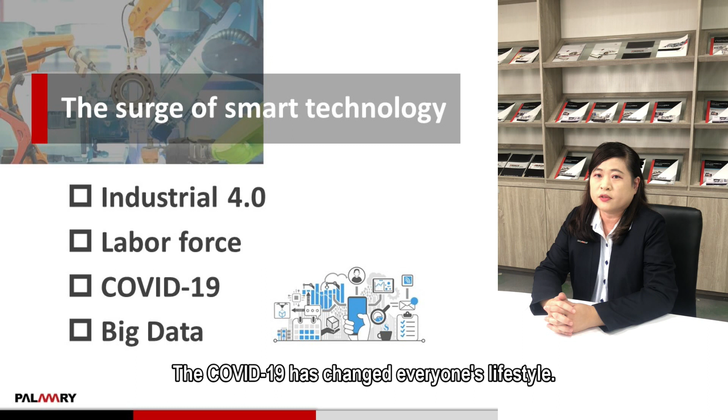It is an extremely unfortunate year in human history. The COVID-19 has changed everyone's lifestyle, but it is also an opportunity for labor patterns to begin to change. Long-distance work is not just a simple matter of working at home. It is not just a transition plan for advanced development in the virus period. It will bring huge change to the future labor market, and the long-distance work model will gradually enter and impact the overall labor market.

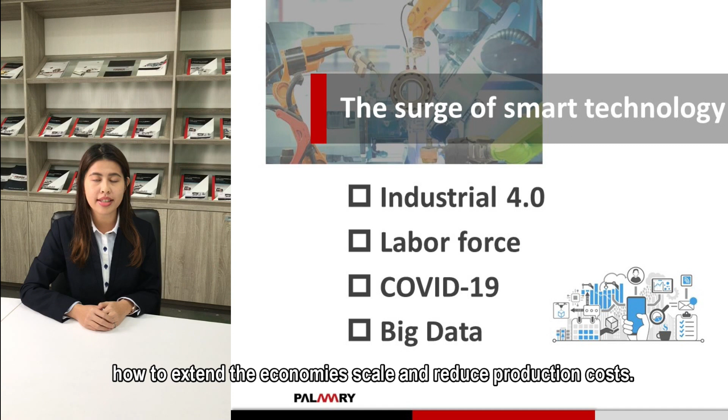Vanessa, do you think COVID-19 has changed the industrial supply chain? With increasingly global competition, companies are all thinking about how to extend the economy of scale and reduce production costs. Thus, smart technology has become a trend gradually. Most companies require automatic solutions to reduce capital expenditure and increase productivity.

So, Isabel, what's your anticipation on industrial automation? In the current production automation, industrial robots, machine tools, and industrial computers are all important applications. They allow manufacturers to reduce part of the manpower on the production line, achieve production goals more efficiently, and in the process of manufacturing industrial robots, machine tools, and other mechanical equipment, and in the production equipment used in the semiconductor and optoelectrical industries, we can see there is an indispensable part.

Without it, this device will not run smoothly. Without it, these products will not be able to achieve the accuracy required by the industry. Therefore, the part is known as a small screw in the mechanical equipment. It can also be said the transmission components are indispensable parts of automation equipment.

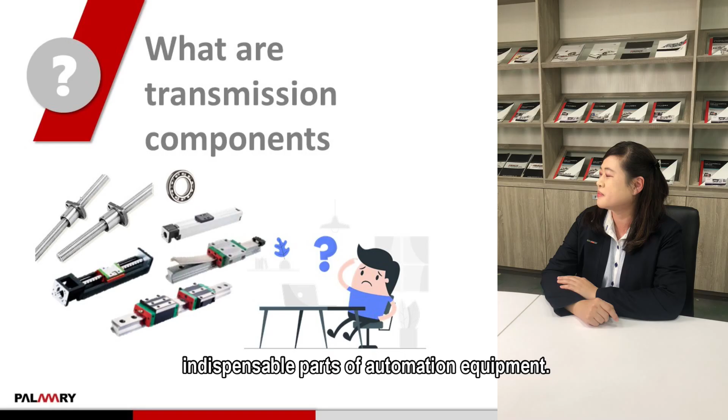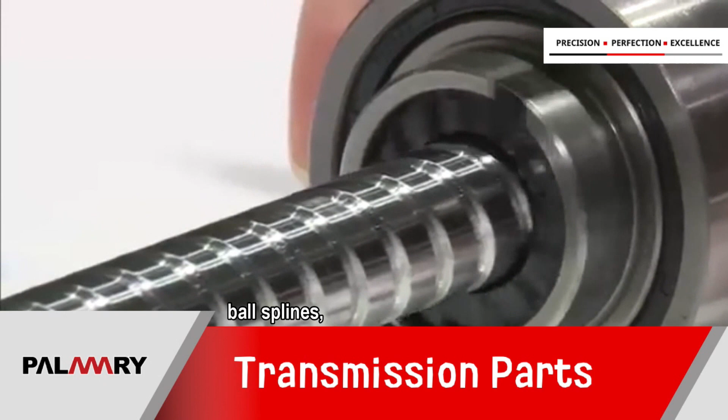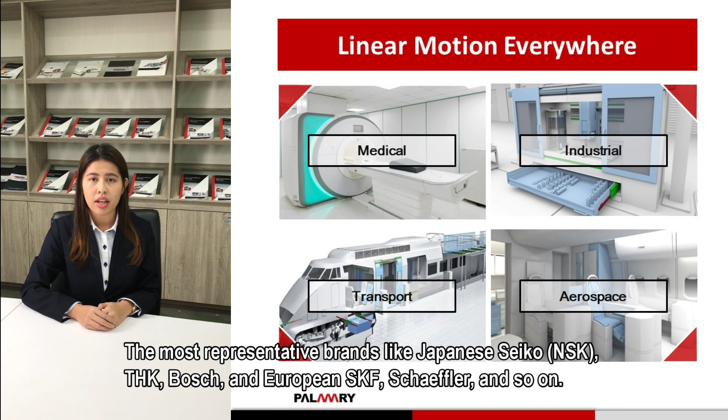Vanessa, what are the transmission components? The so-called transmission parts include ball screw, linear slide, ball spline, and single-axis robots. They are not only used in smart factories such as manufacturing, aerospace, and automobile industry. The most representative brands are Japanese Seiko, THK, Bosch, and European SKF, Schaeffler, and so on.

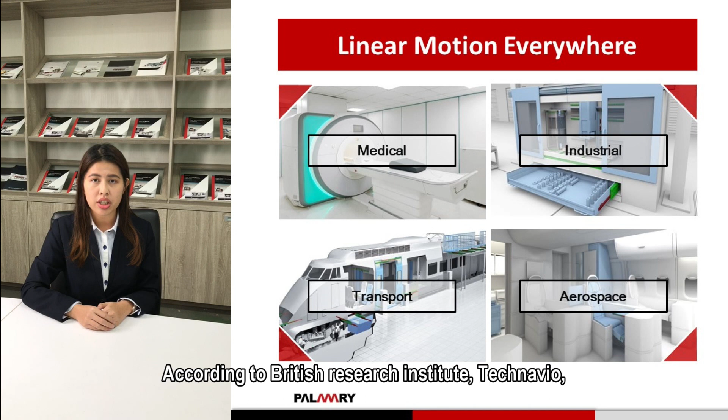Besides, the transmission parts market has been booming recently. According to British Research Institute Technavio, ball screw and linear slide are the majority of transmission use.

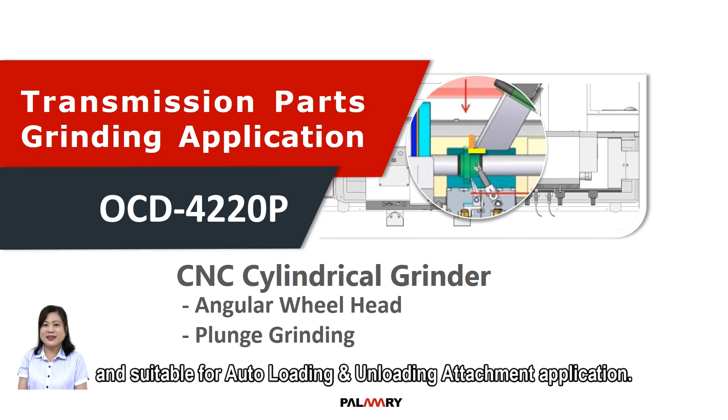Let's talk about the transmission parts application. We use model OCD-4220P CNC cylindrical grinder with angular wheel head with plunge grinding. It can grind face and OD at one time, and also adapt with synchronous tailstock. It can drive the parts directly without the other cam lock or driving parts, to shorten the setting and cycle time, and is suitable for auto-loading-unloading attachment application.

The machine spec: swing over table is 420 mm. Distance between center is 200 mm. Maximum grinding diameter is 400 mm. Maximum loading between center is 115 kg.

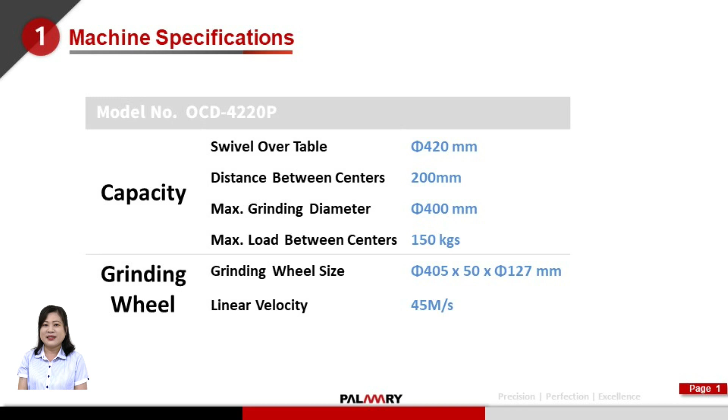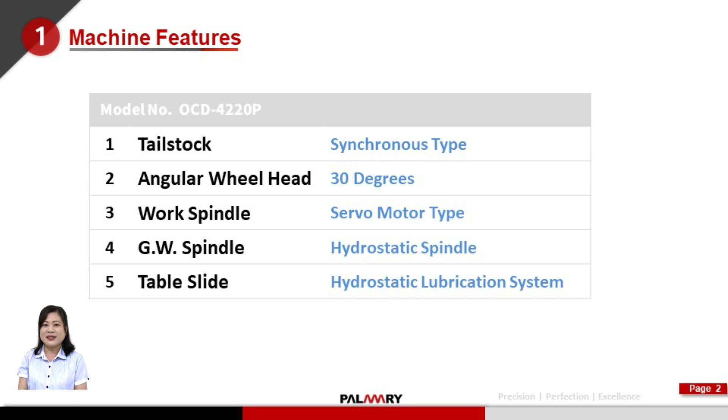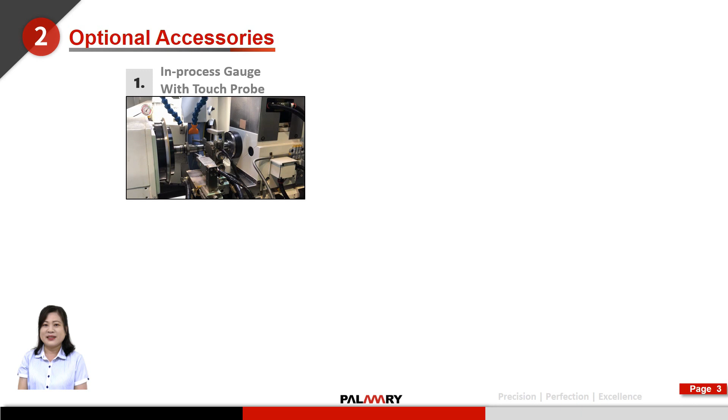Machine features: synchronous tailstock, angular wheel head with 30 degree, workhead spindle with servo motor controller, grinding wheel spindle with hydrostatic bearing, table slide with hydrostatic lubrication system. Optional accessories include in-process gauge with touch probe gauge, wheel head balancer, diamond roller dresser, and synchronous tailstock.

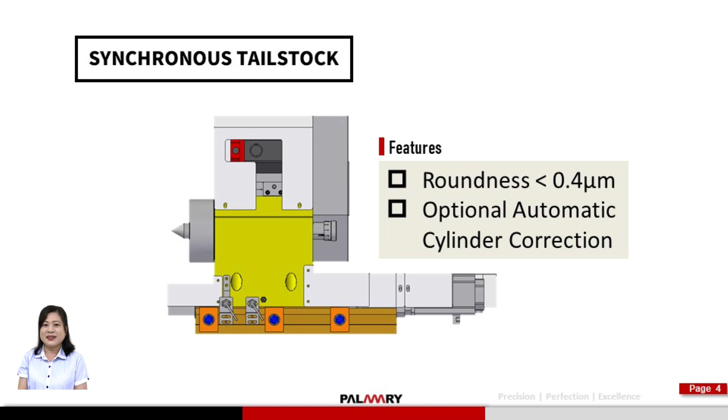Synchronous tailstock features: it can achieve roundness below 0.4 micron, optional with automatic cylinder correction. The workhead driving and tailstock driving work together, which can shorten the cycle time.

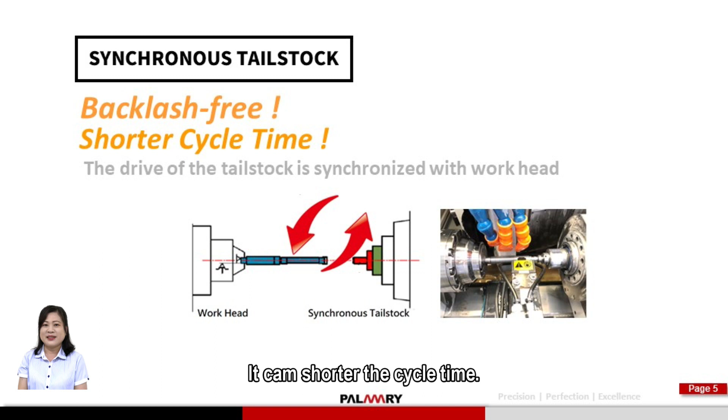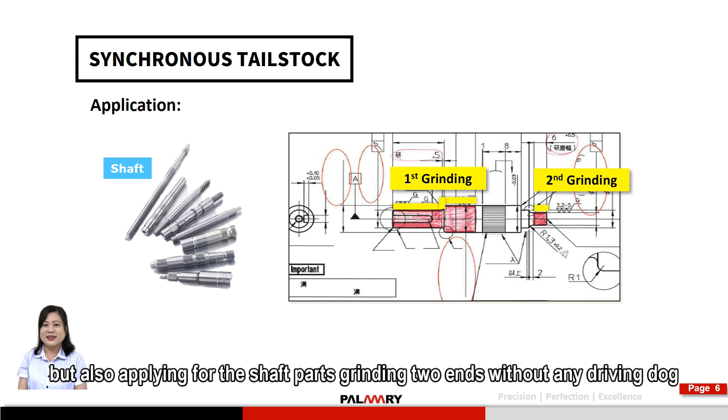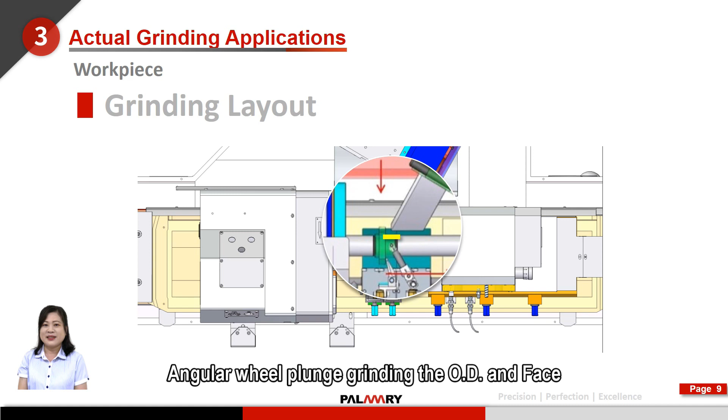Application: it's not only for transmission parts, but also applies for shaft parts grinding two ends without any driving dog, the ball screw nut face and OD grinding, and angular wheel plunge grinding the OD and face at two-end driving to increase grinding efficiency.

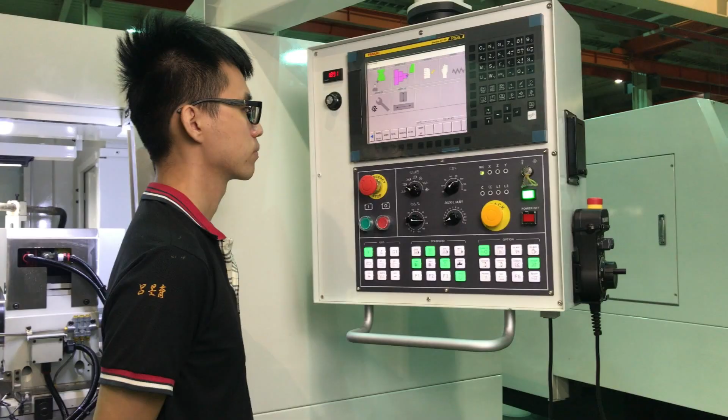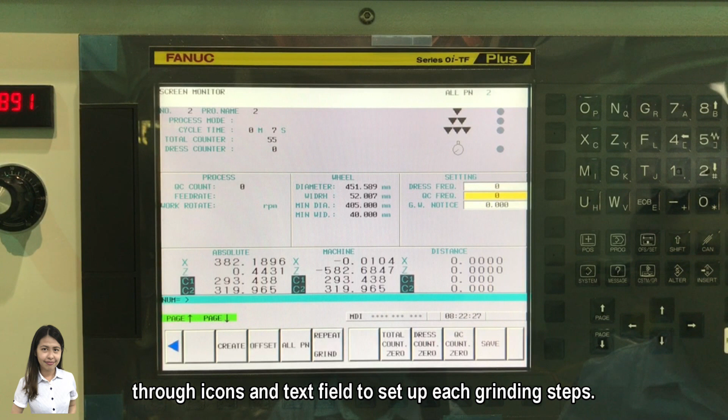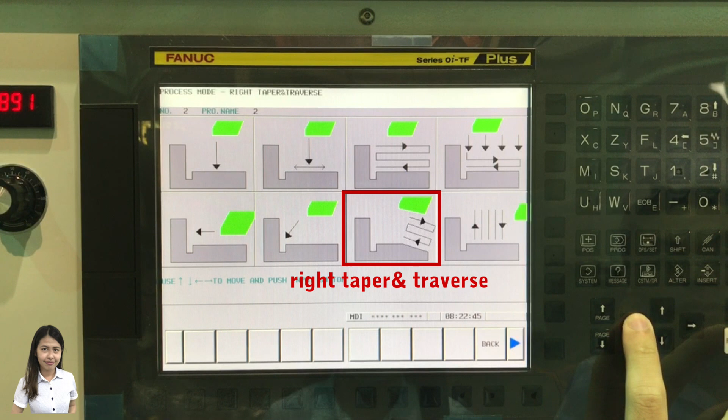For user-friendliness, PALMARY developed a graphic interface. Our customers can easily understand it through icons and text fields to set up each grinding step, including plunge, oscillate and plunge, traverse, multi-plunge, face traverse, right taper and traverse, right angle plunge, and right shoulder.

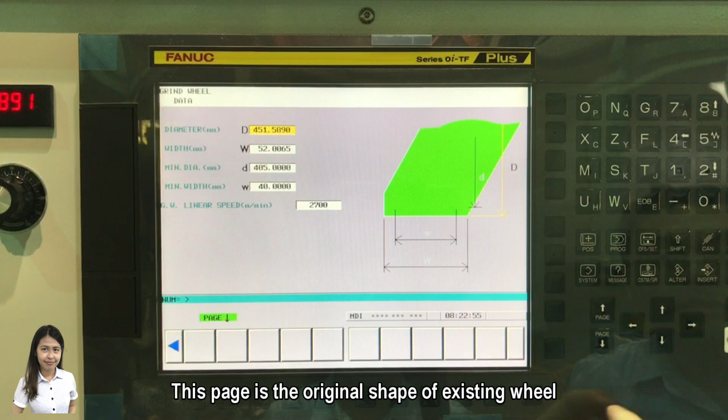It even allows you to create the grinding path for certain profile pieces. This page shows the original shape of the existing wheel, and we can create a dressing profile as the customer requests.

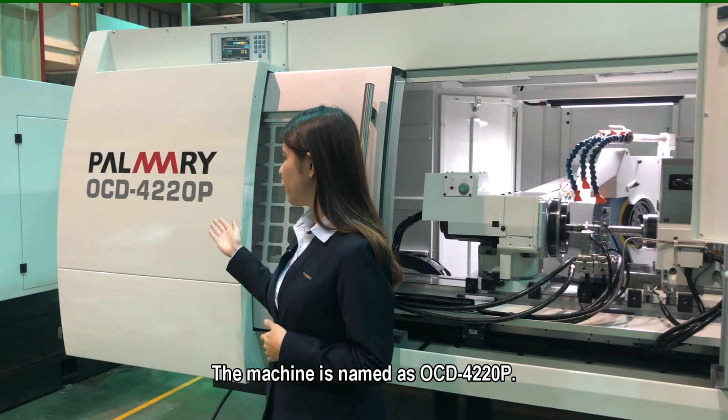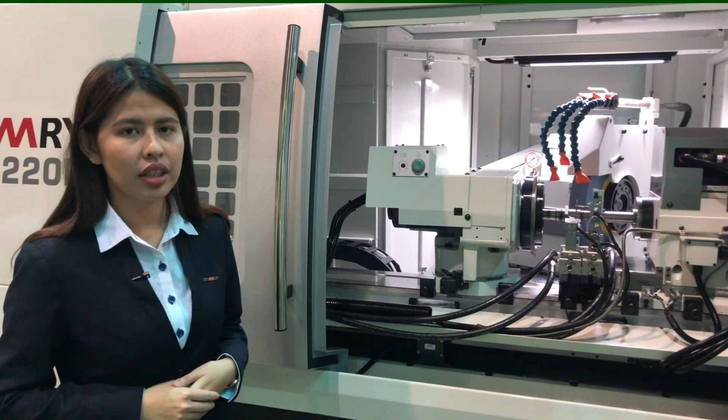The machine is named OCD 4220P. The swing diameter on the workhead is 420mm, and the distance between two centers is 200mm. What exactly does the model P mean? P is for plunge type. The grinding wheel is plunge type but with angular grinding wheels.

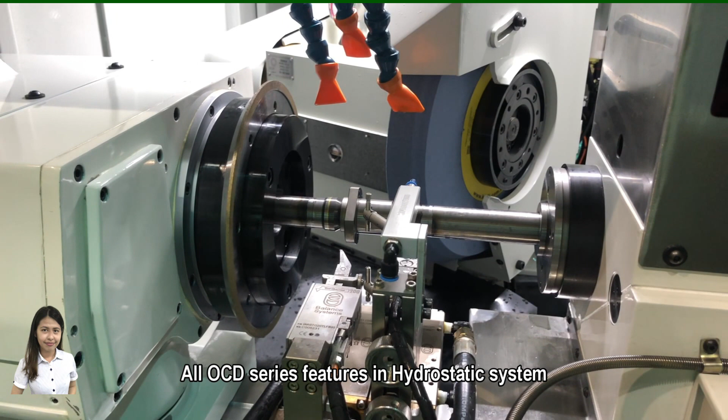All OCD series feature a hydrostatic system to avoid metal-to-metal friction and have a better damping effect. Now let's move to the grinding process.

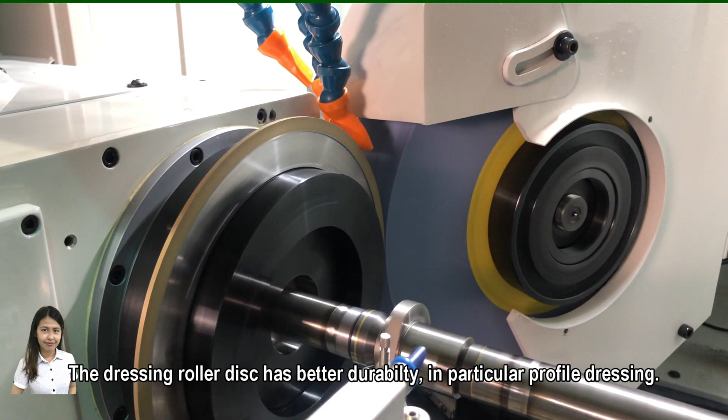The dressing roller disc has better durability, particularly for profile dressing. The angular grinding wheel will be dressed both on face and OD mutually to ensure the right shape.

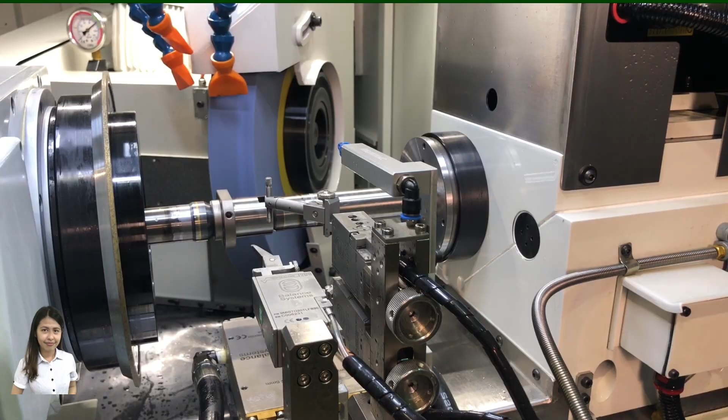C-axis for specific angle. Then the function of the touch probe is to do the positioning before the grinding wheel infeed, avoiding back crash or danger.

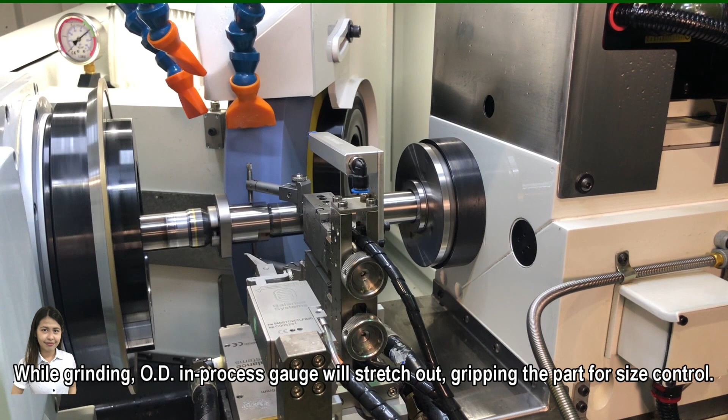While grinding, the OD in-process gauge will stretch out, gripping the part for size control, and the signal will be transmitted back to the controller for auto offsets.

The transmission parts are applied across a variety of industries. At PALMARY, we also have a great amount of experience in automation. In the next chapter, you are going to see more applications in the grinding field with our sharing.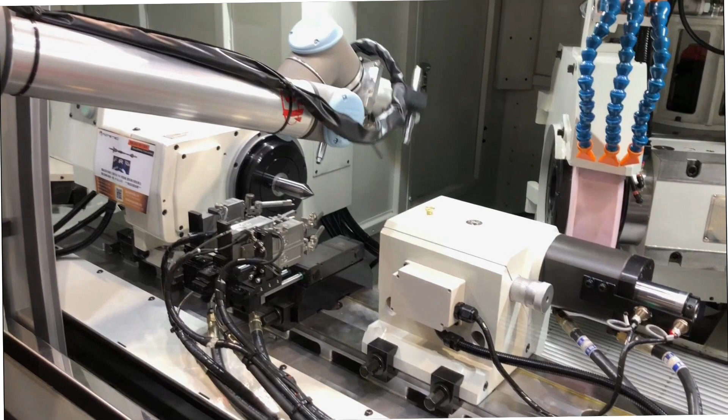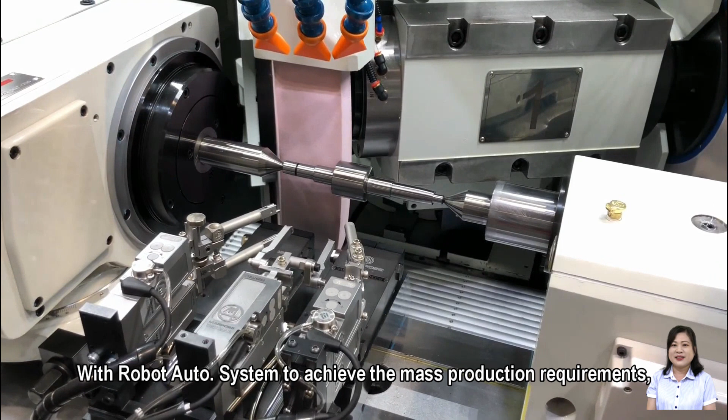Universal grinder loaded with two angle wheel heads for two-side journal parts and one clamping grinding application, with a robot auto system to achieve mass production requirements, non-labor auto control, and industrial 4.0.

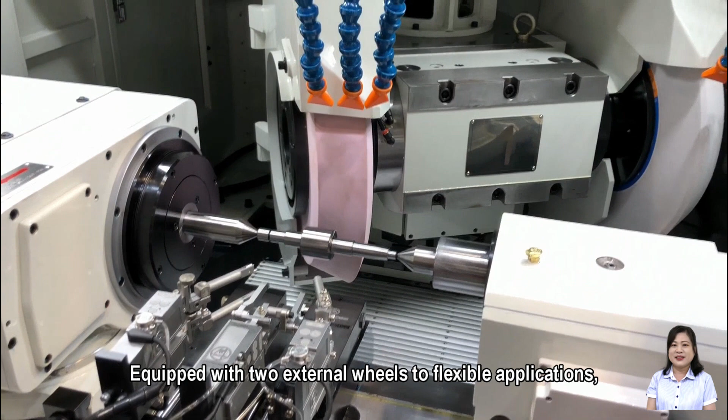Equipped with two external wheels for two flexible applications, which is good for multi-phase outer diameter grinding while clamping once in order to keep high accuracy and quality.

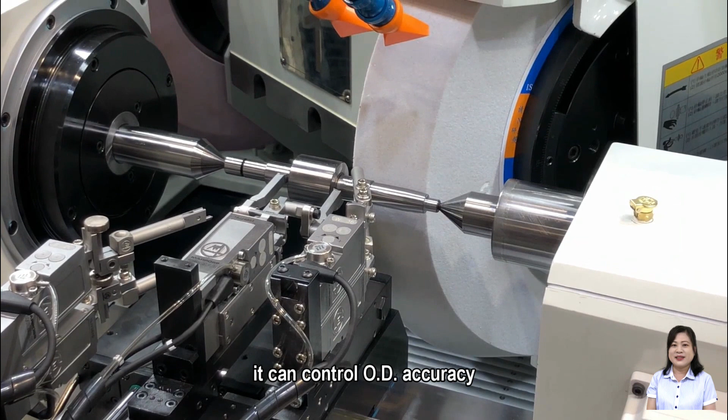Matched with PALMARY's OD gauge, it can control OD accuracy to increase production efficiency and grinding accuracy.

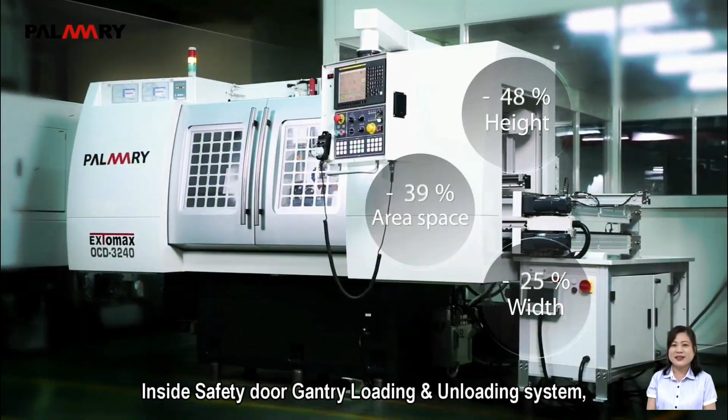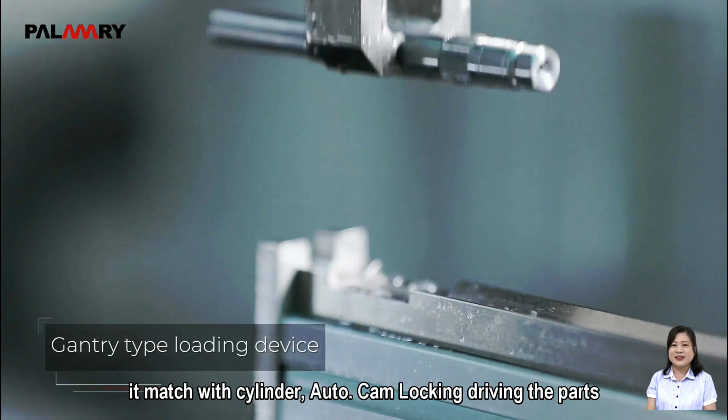Inside the safety door, a gantry loading and unloading system can save the safety door open-close time. It matches with a cylinder; auto cam locking drives the parts to reduce the auto loading, unloading, and grinding time.

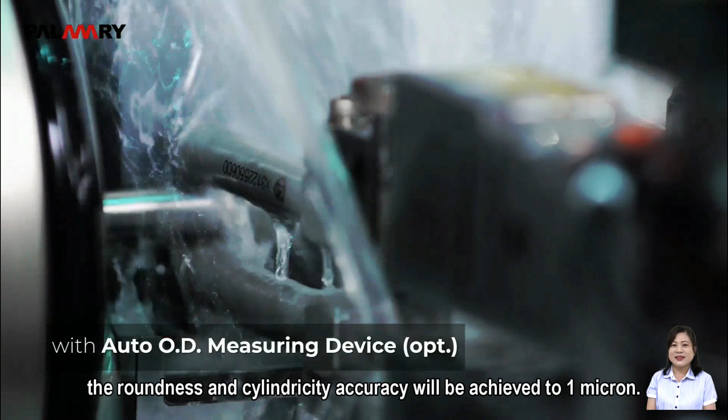Applying auto shifter with multi-step OD plunge grinding application, the roundness and cylindricity accuracy can be achieved to 1 micron, suitable for mass production automation and industrial 4.0.

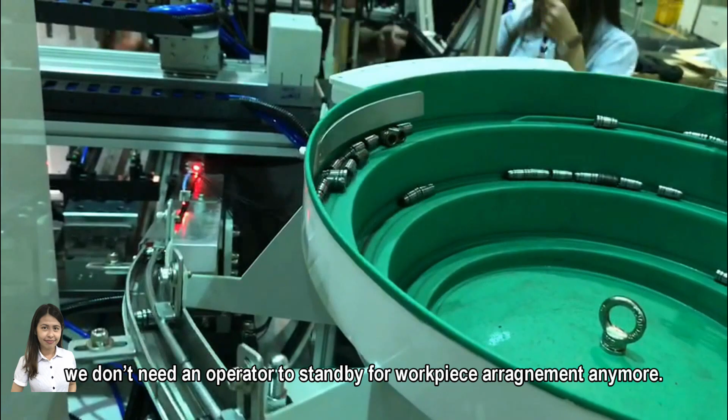The machine is equipped with automation including a vibratory feeder and gantry loader. For the demand of lights-out factories, we don't need an operator to stand by for workpiece arrangement anymore.

The vibratory feeder can arrange parts in a row before grinding. Meanwhile, it has a CCD to ensure the right loading direction.

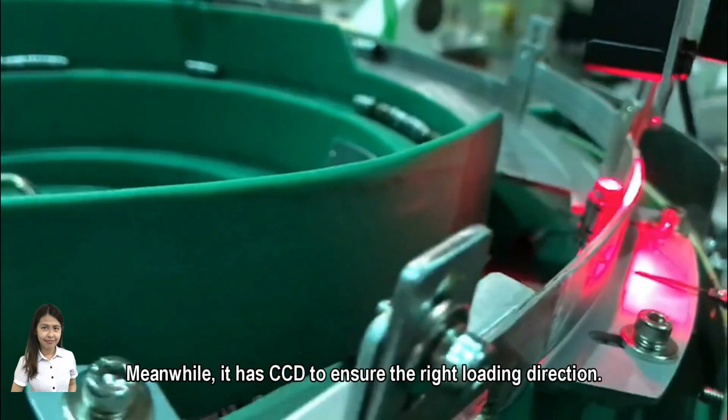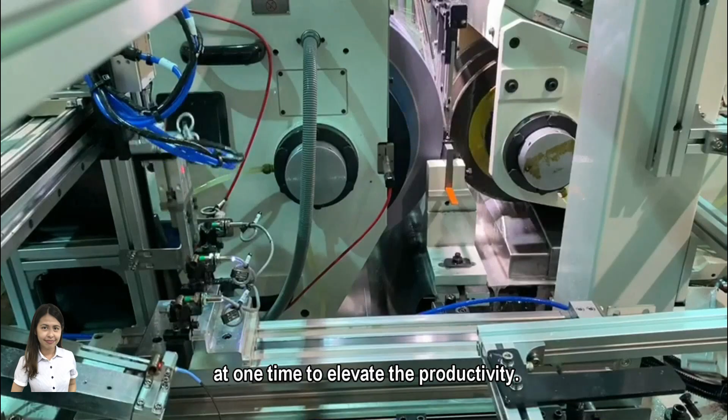Parts will automatically be put onto the blade by the gantry loader and grind 3 pieces at one time to elevate productivity. Thank you for watching today's video.